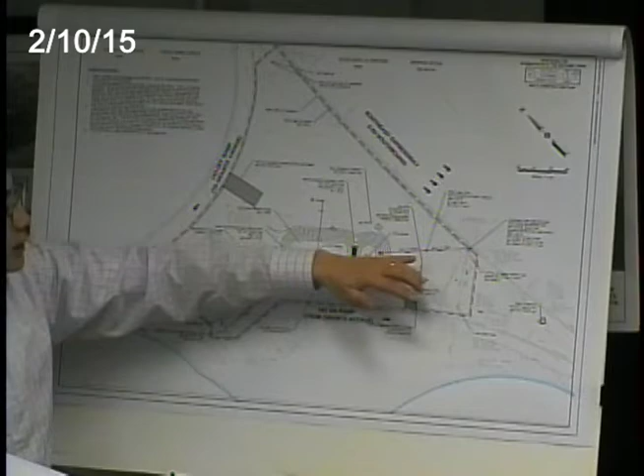Do we have it, John? Yeah, this is going to change a little bit, in part because there's the existing MWRA line, so we have to clear that. Investigation showed that we do have the vertical clearance to do it. This area will have to change a little bit, but nonetheless this is outside the jurisdiction area, so that's basin D.

But it's the same strategy, just a larger capacity. In this case, the proposed idea is there will be some kind of under-drain system to collect the leachate, because the soil underneath is not as infiltratable based on the geotechnical investigation. That's why we introduced the under-drain. So do we have a drawing for this?

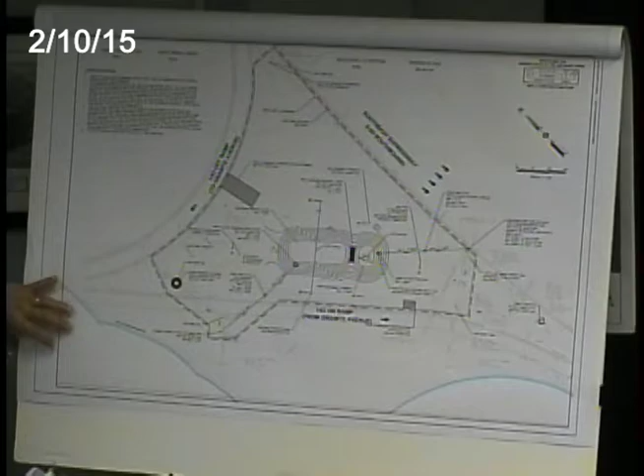Is this A? No, A is Boston. So this would be E? Okay, yeah, E. Here, as you know, this is the depot, and these two are existing ponds for the depot, if you're familiar with it. So we're really not doing much over here.

We found out that part of the runoff from the highway somehow mysteriously goes into the pond, which in my opinion probably shouldn't happen, because these ponds are supposed to be responsible for the development right here. But they come in nonetheless, and where they come in is very close to the outfall. So what we're doing is, now that it's already coming in, trying to address it, and also the outfall is in pretty bad shape.

So this is really not a full removal mechanism like this one and this one. This is just trying to clean up the outfall and make sure that if it comes in, it gets a little bit of settling time before leaving. So this is more, in my opinion, like a maintenance project to clean up the outfall, redirecting the inflow. We're not going to make this pond bigger or smaller because they're designed for their original purposes, not the current purposes. We can't do much about it.

We walked it, and we can avoid all significant trees. I wanted to come in through this direction at first, but the terrain seemed a little tough, and it was made a bit tougher with regards to some of the tree placements. So this route is actually a bit wider as well. I have a sketch here that shows why I chose these locations.

Just take a step back and give us the big picture. The test pits are for what purpose? Stormwater — to make a determination of the soil's capability of accepting stormwater recharge.

All right, and are you identifying certain areas to do the test pits that conform to your recharge areas? Right here. Okay, and you'll see the yellow represents our stormwater retention, and the red pits are where we're proposing it. We have hired a geotechnical engineer who will be attending this soil testing, Nick Laney out of HML Associates in Hingham.

We're also proposing to do 4 borings across where the bridge connection is, and Nick will be running the show on that as well. We've got New England Boring — New Hampshire Boring, is that correct? New Hampshire Boring coming in, and he walked the site with us as well. There was snow on the ground then, and he didn't seem to have a concern with getting his Bombardier rig in there to take care of it.

So again, no trees — we can access all areas, move in, move out, around, and we won't have to clear any trees. Is it a day's worth of work? I mean, is he doing it personally? The test pits alone, the way I see it, we'll backfill as we go.

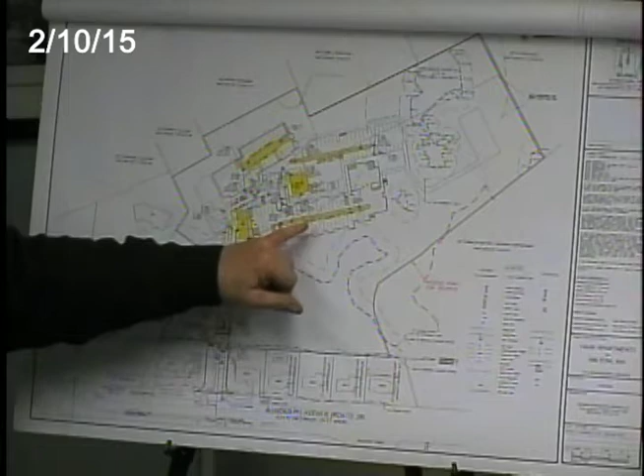Correct. Now, you're saying a minimum of 8, but how many as well, possibly? Let's say, I mean, it's anticipating the soils. If the soils start to change, in a sense, if I have gravel here and till here, I'll want to put another one in there. So I'd say maybe another maximum of 4, but not within the wetland at all. Nothing at all. But it's all within the chamber zone, right? It's all within the yellow zone? Exactly, 100%.

Do you plan on doing any test pits along the foundation wall at the edge of the wetland? Because that's a significant structural potential. Not at this time, and I gave the plans to my geotech, and he may have a different opinion.

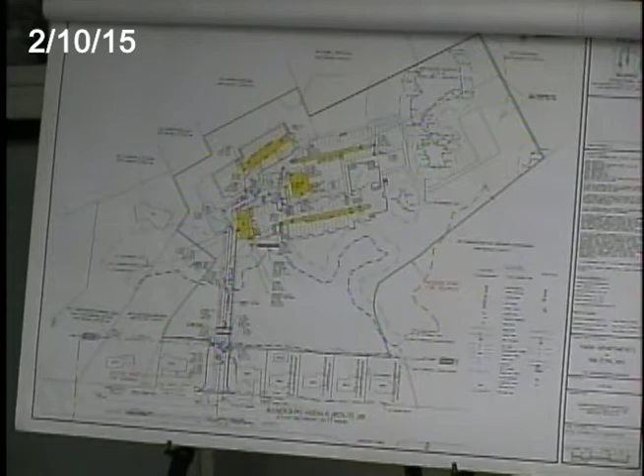Which foundation wall? The big one that's overlooking the wetland, I'd say the one here, the bigger one, to the right, the long one. Yeah, that's the big one. And I'm sorry, because I don't think I saw the plans of you moving the snow removal area.

Oh, unfortunately I didn't bring them with me tonight. But we did make some revisions, and as we discussed last time, we were just waiting for the right opportunity to submit the plans. It's not that it's a surprise - I'm just trying to keep the number of revisions down to a minimum, I'm expecting a peer review to come forward. But like I say, I have no problem releasing a set of drawings for the next meeting in March, so you can take a look at that. I didn't mean to distract you. No, that's it, I just, like I say, it's information for you guys. I didn't want to go crashing in there and you guys find out about it later on.

When do you anticipate doing this? Like I say, I would expect the borings could be done as early as next week. With the snow? Yeah, he says he can do it, he's better with that, it's actually cold. I mean, the frozen ground? Yeah, frozen ground, and actually the snow will float a little bit. It might be tough getting through, I don't know how much it'll sink. There's not a lot of pressure, pounds per square inch on that rig, but it certainly will compact the snow. But I would expect the borings to be done next week, and I would expect the test pits to be done probably the first week in March, or might be the last week in February, depending on what the selectmen do. We probably could have the results from the wetlands area before the next meeting, but we were waiting on the approval from the town for the test pits.

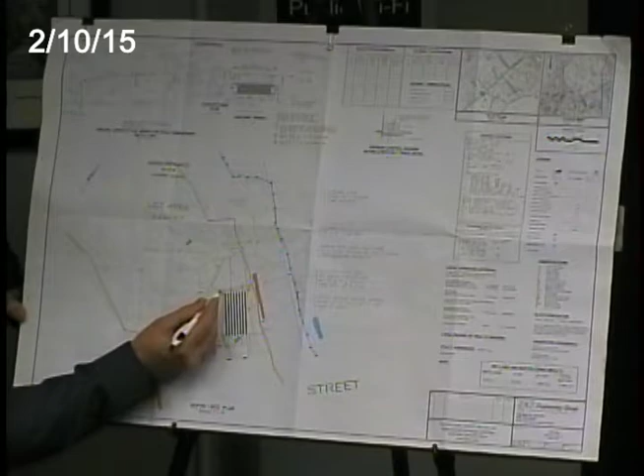One clarification—the leaching field is under the driveway, and the driveway's in front of the house, but I couldn't find the driveway on the map. It doesn't really show since it's gravel; on the survey they didn't give a change of area between that and the lawn. It comes in as a V shape, comes down right to the front of the barn, and comes back out just outside the septic tank—so it has two entrances, like a horseshoe.

There's a small vegetated area, probably right where the D-box is, just to protect that. The driveway is gravel, all gravel, no bituminous. From what I've seen, it's just stone down, fine gravel, but no asphalt that appears to have been there. I haven't scraped it off to find out, but I find it tough to believe, since the septic field is right underneath the driveway, that there'd be any bituminous or reason to have pavement there—it's just gravel, maybe some stone mixed in, but nothing solid on top.

Nothing that would prevent venting, since you wouldn't have...

January 27th, 2015. Okay, this is the one. We've got some difficulties, I think, with the plans, because we've got 3 sets of plans. This one doesn't have the driveway. The first one filed doesn't have the septic system.

Yeah, that's why, what I started to explain to you is when we filed the NOI in January, we hadn't had the evaluation done yet of the septic system. We didn't know if any work was going to have to be done. So the NOI is going to have to be amended, because there is work that has to be done to dig up and then replace the leaching field in front of the garage.

And we have a proposed septic system repair plan or reconstruction plan, but the Monday meeting of the Board of Health was canceled, so the Board of Health hasn't looked at it yet. So we thought we'd be coming to you today with feedback from the Board of Health saying, yes, this looks pretty good, we think we can work with this. We can't tell you that until the 23rd of February when they meet with us.

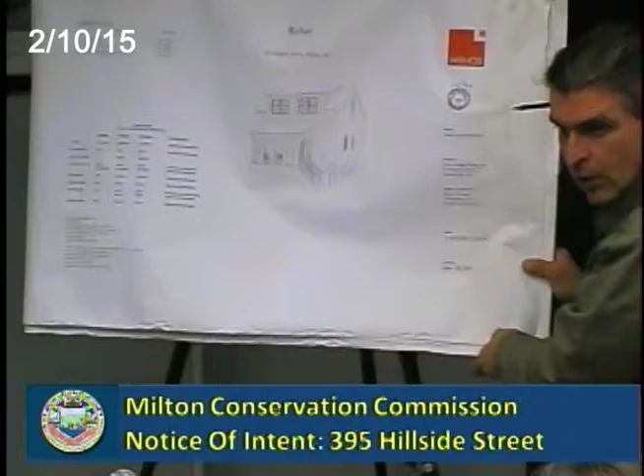And what is the size of the porch? It's roughly 8 by 13. Okay, we will give you the exact dimensions. But that proposed porch has a full foundation under it. That's the proposal, yes. Walkable foundation, so you can stand up underneath it?

That hasn't been determined. You're showing it as stone. Is it stone to match the rest of the carriage house? Yeah, so in practice, it'll be probably poured concrete with a field stone veneer. The elevation here, the grade here is quite high, so there wouldn't be any headroom there.

I think we simply haven't decided, but programmatically, yes, sir, what you're describing to me is a foundation. Yes, but there's not a requirement that you walk through the foundation. Correct, you're not using the foundation. We're not planning to use it for storage. So there's no real reason why we need an 8-foot-high concrete foundation. We could build it on piers and decrease the amount of disturbance of the no-build zone.

And you mentioned, right John, the left-hand wall in this drawing that we can't see is an existing wall. Are you planning on reusing that existing wall, or are you planning on tearing that down? You mean under the proposed porch? Yes, the left-hand wall, as I understand it in this drawing. There's no existing wall. There's some sort of built-up surface with the remnants of some brickwork, so I'm not sure that there's a wall. You don't think there's anything? I don't think there's anything there, yeah.

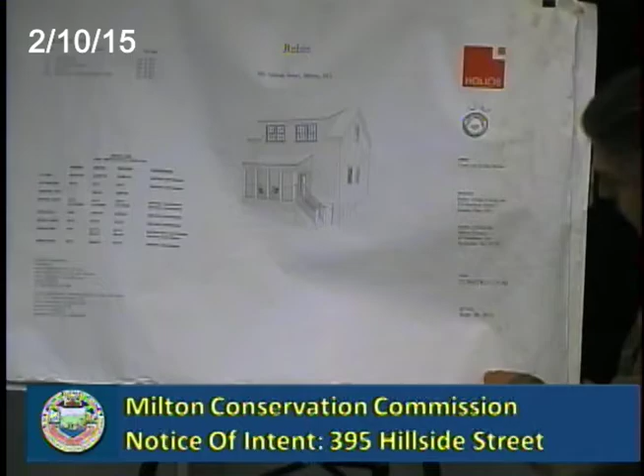So this is the front elevation. The only real visible change is the sliding barn door, which currently runs on a track inside the building. We're going to move it to the outside of the building. We're going to be replacing windows and doors to meet current energy codes, but maintaining the appearance.

So the sliding barn door will be insulated? That won't be, because that's only giving access to the garage portion, which will be an unconditioned part of the building. So the conditioned envelope will be to the side, the left half of the first floor, and then the entire second floor. And we're moving the garage door to the outside to make it easier to condition the conditioned parts.

So underneath the garage door, is there a full foundation under that? Is this whole garage going to have a new foundation, or just with the porches? Right now there is an existing foundation on the front. There's an existing foundation on the right side. There is a foundation halfway down on the left side. It ends about here. There's a stone pier here, there's a stone pier here, and there's currently no foundation under the back.

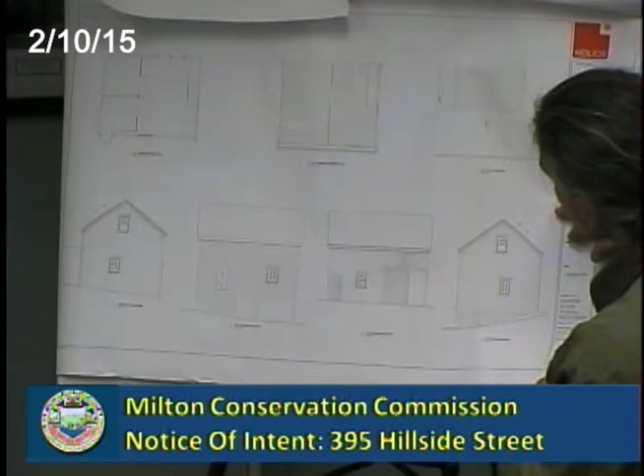And how much detail do you want me to go into about the interior work? No, not the interior. I'm more concerned about the foundation and whether we can bifurcate the concrete foundation from the field stone, or whether we can rebuild the piers, so we're doing less disturbance in a non-disturbed area. You follow me?

The existing piers are spectacularly structurally inadequate. They're tapered stone piers ending in a rock about this big, and the structural engineer who visited the site was afraid to go underneath. So there's a glaring structural inadequacy right now.

Yeah, but when you go do your work, whether we can do something that has less impact on the environment than putting in a continuous foundation. The building code requires a continuous foundation under living space, so I don't think we would be permitted. You're talking about the porch now, or the main building? You wouldn't have half the buildings in Marshfield if that statement were true, because buildings in Marshfield and other coastal locations are built upon piers.

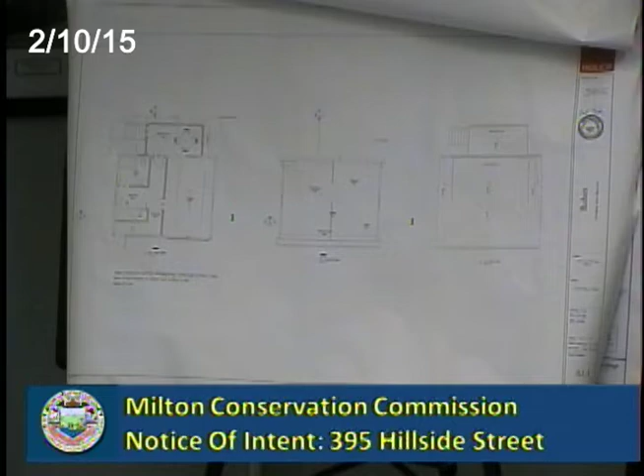So you're saying sliding it as far to the left as possible, rather than 8 or 10, whatever it is now. Right, move it that way, which means we're doing less excavation on this side, maybe leave the landing that you have in place, and then the only thing you would have visible would be the staircase.

I would argue that that's negligible in the scheme of things. And the only reason I'm saying that is to maximize the distance between the new construction and the stream, which is on the right-hand side. That's certainly something that I could discuss with the owners, yeah.

That would be good, because I think that plays into the idea of maintaining the aesthetics, but still trying to maximize the distance that we can. And it's something that we often do for applicants. We often just ask them to move a portion of the building as far away from the resource area as possible, so... Right, well that's true, but we do quite a bit.

The reason I asked for the alternatives analysis in the first place is that we try to be uniform in our application, so that we maintain our credibility. And we've taken out our little tape measure and said that's 25 feet and don't cross the line. And I just want to make sure that we're applying the same standards to all applications.

I think we are. So you're saying don't cross the line, therefore this isn't a viable strategy? What they've proposed is not viable because there is an option to put it on the left-hand side. Well, I'd like to see it, and saving the lawn doesn't move me very much, but it might be because of elevations, there might be something, I need to see it.

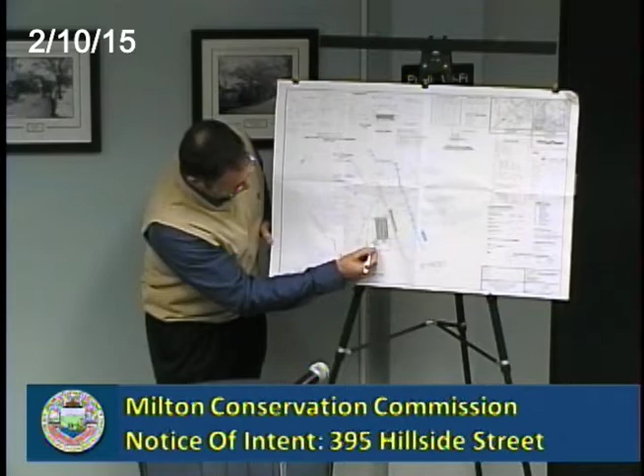It's roughly, if I had it right here, a 30 by 20 stone and pipe bed that's out there now, put in place back in 97, 98, somewhere around there. What we're looking to do now is use the current technology—there's something out there called a Presby system. It's approved for general use by the DEP and by all boards of health. This allows for increased flow to these systems, but with a smaller footprint. It's just that the technology has changed over the last 10, 15 years.

These have been approved. It's kind of hard to tell from here, but it's a pipe, and it has almost like a plastic medium around it. It's almost like an area where the bacteria can now grow around this pipe. Instead of having the sand and stone system where the bacteria mat grew in the sand and stone itself, it happens around this pipe. And the effluent that comes out is now considered much cleaner from this type of technology.

Presby's claim to fame is he tries to drink a glass of water on the other end of this thing right here, and I wouldn't go that far, but it is clean enough now where the DEP allows a system using this to be within 2 feet of the groundwater as opposed to 4 feet, which is standard under Title V. So they do believe there is this inherent cleanliness to this water that comes out here, or at least less of a...

There is less of a biological oxygen demand on it, so it's a cleaner type of effluent. That may be useful to you folks considering that you're only about 30 feet away from this resource area, so that's something to consider.

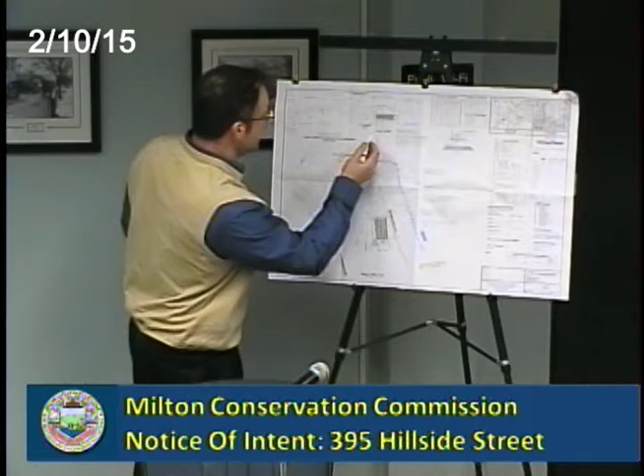So when you do the excavation to set this unit, or these units, the intent is to remove all of the stone, all the perforated pipe, everything saturated that's there, so you're down to fresh dirt. Then you come in, bring it up to your new level, and put this unit in. We want to get down to what they call the parent soil. We take all that stone out of there, and we come right back with a little bit of what they call Presby sand, which is really just Title V sand, and back up with a new construction system. So we get down to the parent soil, scarify that, make sure there's a nice bottom, and then bring it back up.

How old is the existing system? I think it was put in 97, or I'd say 98. The house was sold 98, 99, and needed a new septic system to be sold. I saw the design—maybe the design was from 97 and the as-built was 99, so it's not that old.

But you have to upgrade it anyhow, so it's being replaced for the future. The system did get some relief under the Title V requirements as far as setbacks to buildings and property lines. That's one of the reasons we had to go to the Board of Health to see if we could still work with those underlying reliefs that were granted prior.

So, in looking at how you drew the existing footprint, can we locate the new installation as far to the left, away from the stream, as possible? Or is that just how you drew your sketch? Well, right now this dimension right here is 17 feet. The controlling dimension, or the public safety dimension that Title V calls for, is 20 feet away from a building foundation to the septic system.

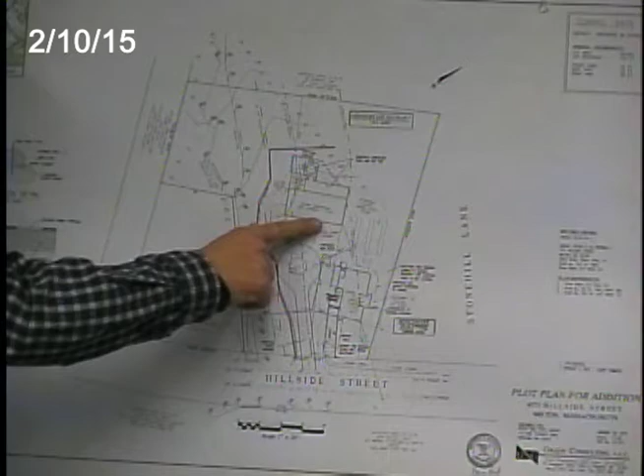Our project is to put an addition onto the existing house in the front. My client would like to access the garage by adding a door to the front, and I'm showing a proposed landing for that door. They would like to have a hardscape patio and hot tub in the back of the garage and barn, and a mudroom included with the addition. As part of these improvements, they'll need to move the driveway - I'm showing the driveway here with a circular ending to it. There'll be a couple trees that need to be removed.

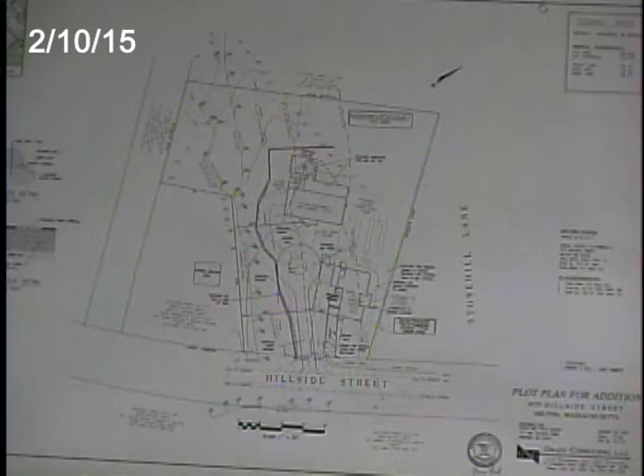Afterwards, is that going to be converted to lawn? It's not, my clients don't want that at this time. It's currently gravel, the existing driveway, and they'd like to put a turf block paver system in there. They don't want pavement. The turf block system uses pavers intermittently with grass. There's a 12-inch base to it that will be able to handle some stormwater, although I haven't done any calculations for stormwater. What is their aversion to grass? That's just what they desired, actually. They desired grass.

Well, I know this property, and I would need to know exactly what kind of trees are being removed, because I know that Jerry had some very nice, very tall, kind of special types of trees there. I don't recall exactly what, but any tree that you're going to remove that's more than, I would say, 8 inches in diameter, I'd want to know exactly what that tree is before I'd agree to it.

There were just some nice trees there. Can we ask them to flag any tree that they propose to remove? Yes. So that we can review it when we're on site, tie a ribbon or something around it. Okay, so what species of trees exactly? Can we get a survey too, with the species and the size? Yes.

And secondly, on the stream itself, with all respect, there's been for many years a pile of things—wood chips—right along here that have accumulated. So that needs to be looked at.

Not quite compost, more landscape debris - branches that need to be cleaned up and removed. At least they need to be addressed. You need to consider what's there to let us know more specifically. It's right along the stream, almost into it, all along from just in front of the barn all the way along. You need to check that out and see what exactly has accumulated. It may be just fine, but it needs to be looked at.

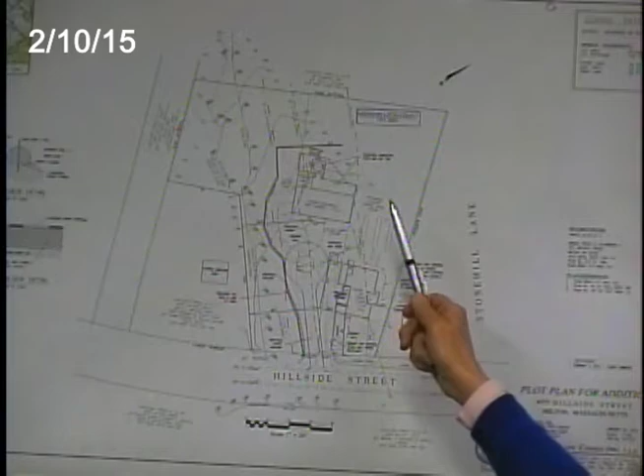One other point: there's a naturalized plant in the back of this house, the native yellow poppy called a celandine poppy. There aren't many places where that's naturalized, and it's back here, mostly in the wetlands because they like it wet. I want you to be aware of it because I'll be looking at the impact from this, particularly the hot tub, to make sure they don't destroy it during construction. It's quite nice, and it's very rare.

Why is there a tree removal to the right of the existing home? I asked the same question - this is something my client asked me to put on the plan. I didn't see many trees on their property line, so I advised them to make sure they get it staked before they remove anything. But it's in your jurisdiction, so I wanted to make sure it was included in the notice. You don't know why they want it or what it is? No, it was one of their requests. Can you make sure that gets flagged or tagged so we can discuss it more in a second?

What about the existing stone wall? I understand there's a difference between a stone wall on a street with National Historic Register status and a stone wall on the property, but I don't know the answer - when do you have to go to the Historical Commission and when do you not? Is it a property line issue? No, it's a scenic road issue. Hillside is a scenic road. Is the wall on the road, or is it inside? It was both. The rules say that if you're removing more than a certain number of feet, I think it might be 8 feet, but we need to check the regulations, then you need a scenic road permit. But is that limited to a stone wall on the roadway or parallel to the road? Along the roadway - I don't know of anything that regulates stone walls inside.

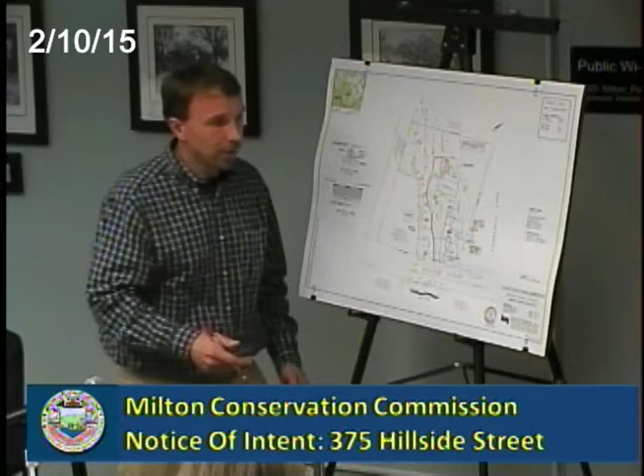But obviously they can't build the addition with the stone wall there, so I wanted to tell the contractor you had to remove the stone wall, and also get permission from you as far as it is in your jurisdiction as well, for that work.

So you're basically tearing this house down? Not the house, where it says proposed addition. You're butting against the existing house. Okay, so the existing dwelling, is that gonna remain intact? Yes. You're not gonna cut anything out of it? Nope.

On the existing barn slash garage, that's gonna remain intact. They would like to make some improvements to it, like painting. They told me they would pressure wash it, and also do some things on the inside. But as far as any structural changes or changes to the physical shape of it, no, they did not tell me they were going to do that.

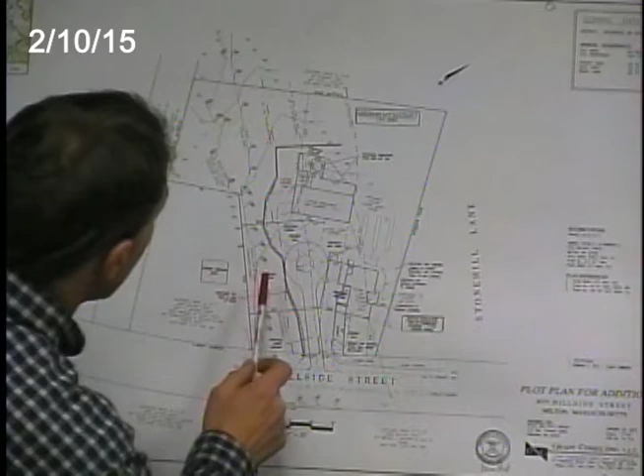Yep, but 170 is existing too, and I plan on keeping that. Showing spot grades on the driveway, that's kind of 173.6 up near the house and 171.7. I actually think I can make those grades work. So you don't see any regrading anywhere on the property? No, there's no regrading.

What I am proposing is to excavate out 12 inches for the driveway, but I'd like to make it back to the same elevations.

I just wanted a clarification on the new driveway - it says proposed gravel driveway. Oh, yes, it should be turf block driveway. Okay, so you want to make that change? Yep.

So you're proposing a 24 by 44.7-foot addition to the house? Yes, that's correct. That's a full foundation? Full foundation. Walkout? No.

The numbers don't exactly work for me because this is the existing - if this is 24, how can this one be 24? It's shorter, this is longer. I drew it right through to here. Oh, okay. So that includes that stairwell. Yes. Okay, that makes sense. I don't have the final architectural plans, but that was what was portrayed to me.

And going to Judy's question, I think about whether or not there are any bedrooms, et cetera, in the barn. There's no connection from the barn to the septic system that I can tell. I got this right off the record plans that they provided, and I didn't see a connection on those plans. I just wanted to ask, what's the gas for in the garage? They already have a gas propane tank back down here. They did have this existing - it's like a screen porch back there. I haven't been inside the barn or the garage, so I'll have to get you that information. Because that's a legitimate question - if they're gonna put bedrooms in there, they're gonna have to put a bathroom in there, and then we need septic plans, right? Okay.

We hate to be in the position of approving an addition, and then have, oh my God, we forgot to include the bedrooms. Actually, that's a good comment, because they're doubling the size of the house, and they're not making any modifications to the existing septic system. So what's the plan for the septic system? I haven't been told they were adding any bedrooms. Can you ask them to provide architectural drawings for what the addition is, including the existing house? Sure.

Are you looking for elevations, or just a floor plan? Really, the floor plans. If they have the elevations and can include them, that would be appreciated, but we're really looking at floor plans.